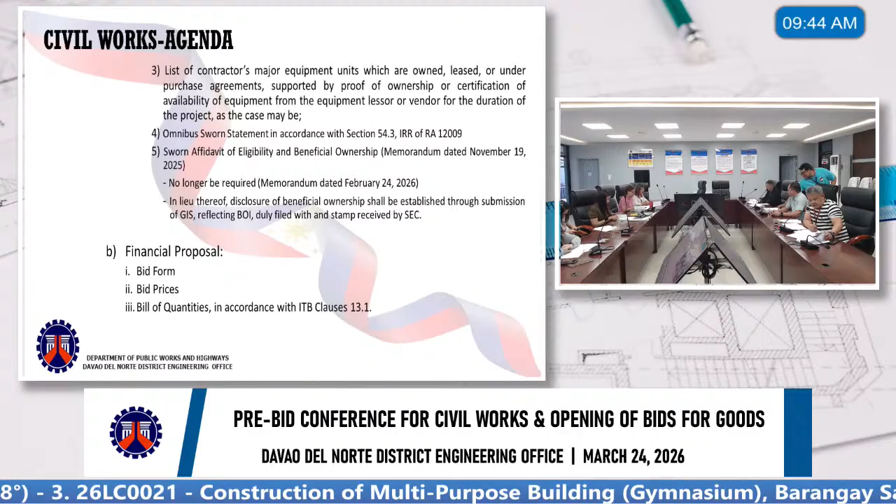Number 2 is the questions and comments from the bidders. Number 3 is other matters, including item 3.1, the interim guidelines upon lifting the suspension of procurement activities for locally funded civil works projects, as referred to in the memorandum dated September 16, 2025.

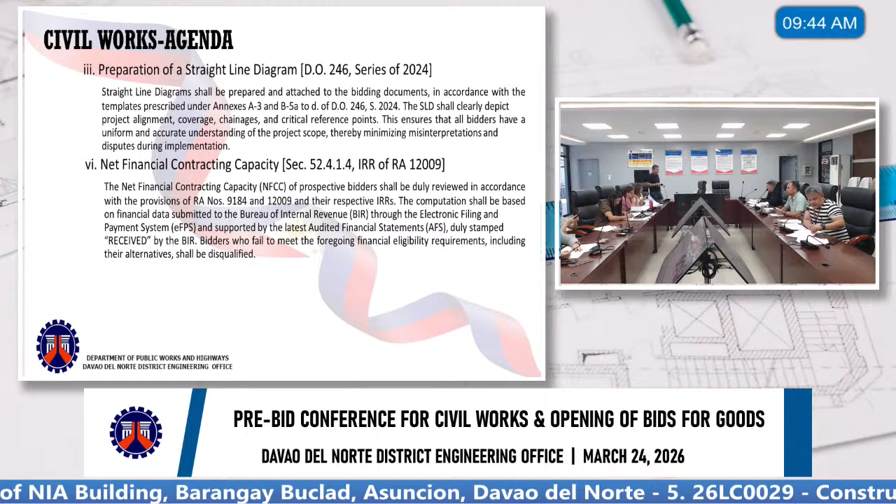Item 1 covers the live streaming of bidding activities under Section 38.2 of the IRR of RA 12009, and geotagging of project sites under DO 85 series of 2020. Then, preparation of straight line diagram under DO 246 series of 2024, and the NFCC or Net Financial Contracting Capacity under Section 52.4.1.4 of the IRR of RA 12009.

And the bidder's responsibilities under Department Order Number 28, Series of 2024, dated February 26, 2024, subject: the three-strike policy for infrastructure, goods, and consulting services.

Item 4 covers the occupational safety and health program in the instruction to bidders, under Department Order Number 241, Series of 2024, on guidelines for processing, approval, and reporting of construction safety and health programs for DPWH infrastructure projects, and Department Order Number 171, Series of 2025, dated August 30, 2025.

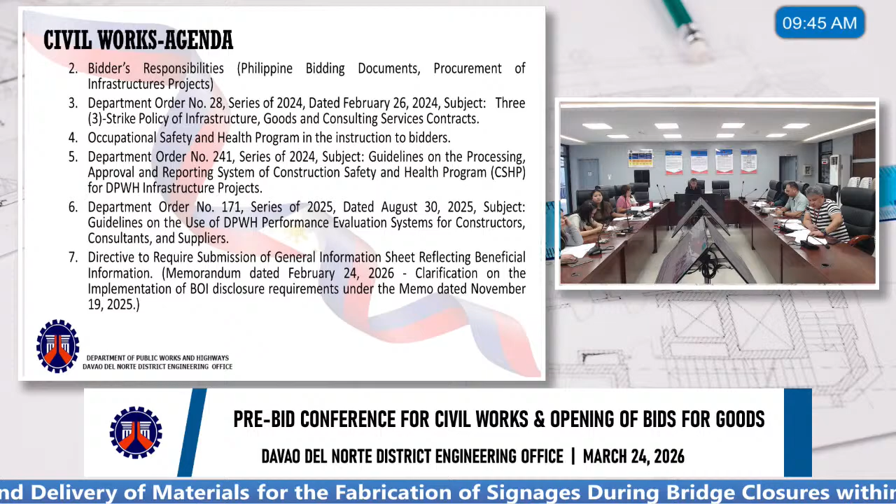Subject: guidelines on the use of the DPWH performance evaluation system for constructors, consultants, and suppliers. Item 7 is the directive to require submission of the GIS or General Information Sheet reflecting beneficial ownership information, per memorandum dated February 24, 2026.

Clarification on the implementation of BOI disclosure requirements under the memo dated November 19, 2025, and the summary of proceedings. We'd also like to emphasize DO 161, subject: guidelines for Bids and Awards Committee or BAC composition and reconstitution in the central, regional, and district engineering offices.

Under the timelines and effectivity, number 3 states current BAC members shall continue to function in a holdover capacity until the new BAC is officially designated. This is also reflected in Republic Act 12009, Section 41.2.6: upon expiration of the terms of the current BAC members, they shall continue to exercise their functions until new BAC members are designated.

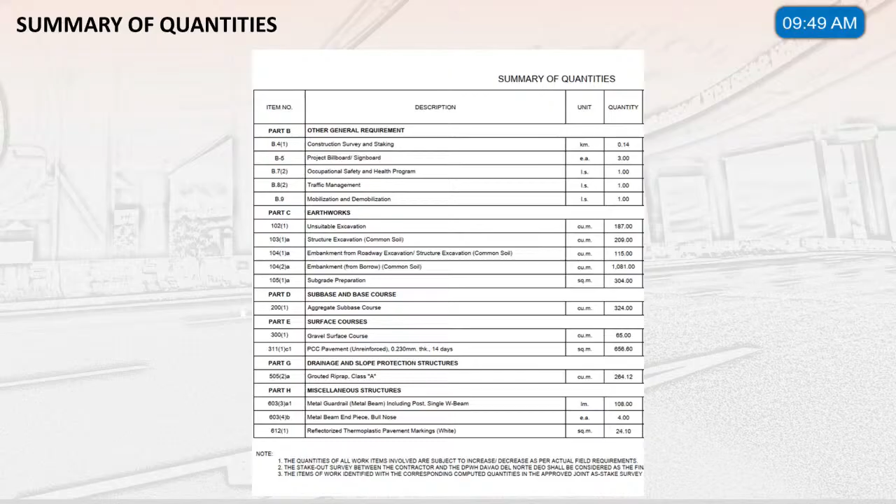Part E, surface courses - gravel surface course, PCCP pavement, unreinforced, 0.23 mm thick, 14 days. Part G, drainage and slope protection structures - grouted riprap, Class A. Part H, miscellaneous structures - metal guardrail, metal beam including post, single W beam, metal beam end piece, bull nose, reflectorized thermoplastic pavement markings white.

Location map. Then the cross-section. The geotag photos. The certification. I think that's all. Thank you.

Thank you. Any correction or need to be discussed from the previous, from the pre-procurement activity? None, Mr. Chair. Okay, for the implementing office? None? Okay. Thank you.

How about this? We will check from now on the major category of works. So no problem here? Same as the bridge? Okay. Any other queries from the board members? Okay, hearing none. Let's continue to the second project.

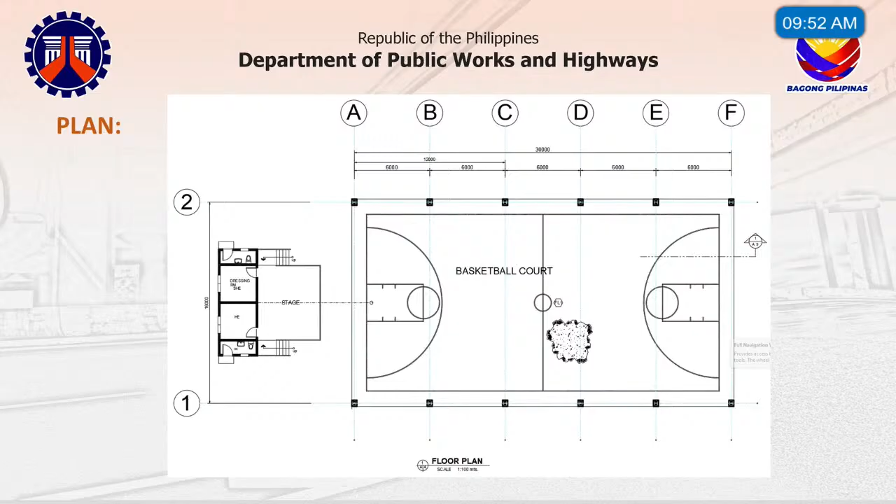You can see at the left side, we have the stage and also we have a 30 by 16 covered court. Next, for the proof of ownership, they have provided a survey plan.

For the DO1 series of 2026, we have Annex A and Annex B. And for the geotag photos, these are the existing MPB, which is to be removed. Then also at the right side, the CR will be removed.

For the summary of quantities, Part A is facilities for engineer - provision for furnitures, equipment, for the field office, and field office and living quarters building for the engineer. In the remarks, note that the equipment is for the engineer first. Then Part B is the other general requirements - permits and clearances, project billboard and signboard, occupational safety and health, mobilization and demobilization.

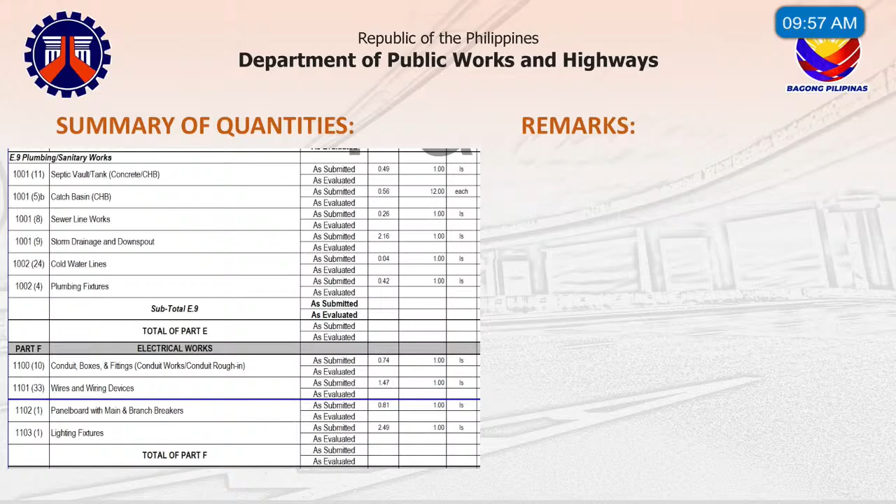And for part F, electrical works, we have conduit boxes and fittings, wires and wiring devices, panel board with main and branch breakers, and lighting fixtures.

Then for the mechanical work, we have a water tank, which is stainless. So that's the summary of quantities for this project.

Okay, thank you. Any matters for discussion? All changes and corrections are already incorporated. For the implementing office? None, Mr. Chair. Any members with queries or discussion? Hearing none, let's proceed to project number 3.

Sorry for that. So, what's the major category of works? Okay, let's proceed to the next project.

For the next project, again, I'm the presenter for 26LC0021, construction of multipurpose building, gymnasium, Barangay San Jose, New Corella, Davao del Norte, with coordinates 125.854603, 7.575390, with an ABC of 14,850,000 and a contract duration of 180 calendar days under FY 2026 GAA.

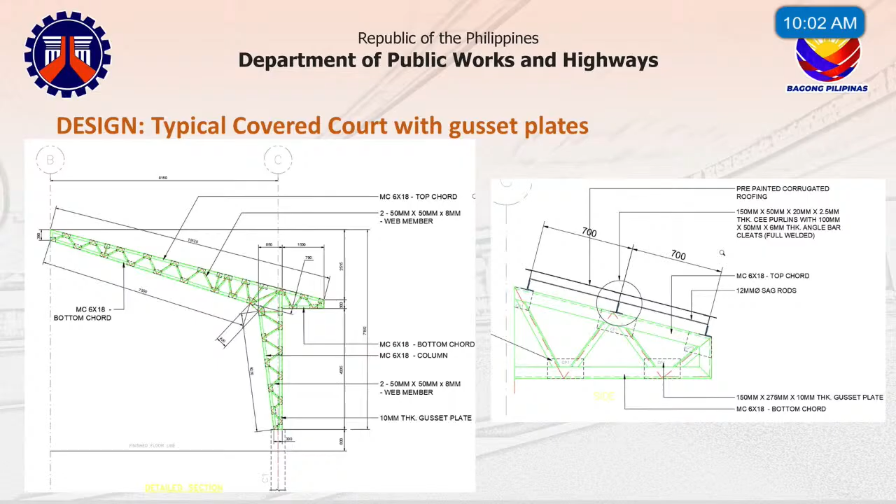Also typical covered court with gusset plates. Next.

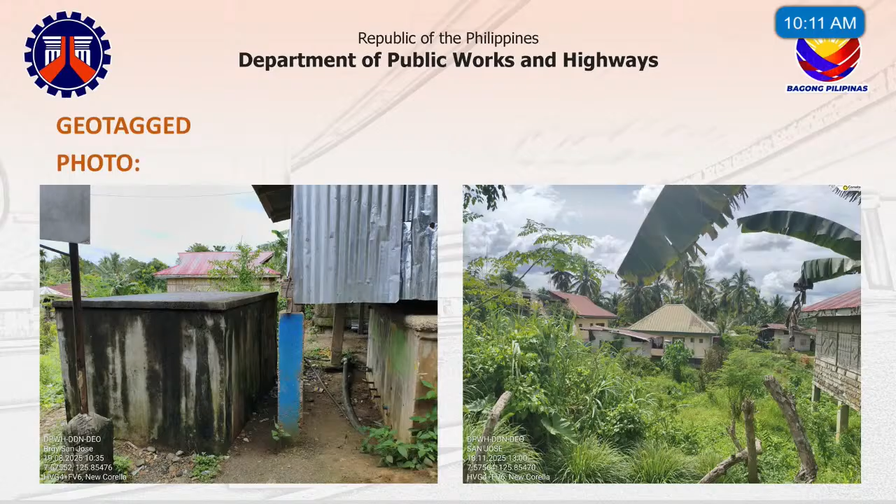Next. So as you can see in the picture, the portion goes down here. There's a big mound on that side.

Next. Okay, for the summary of quantities, we have Part A, facilities for the engineer: equipment for the field office, and construction of living quarters building for the engineer. Part B, other general requirements: permits and clearances, project billboard and signboard, occupational safety and health, mobilization and demobilization.

For Part C, earthworks: removal of structures and structure excavation for common soil, embankment from roadway, structure excavation for common soil, and embankment from borrow which is also common soil. And we also have gravel fill.

Then for Part D, reinforced concrete: we have structural concrete Class A 4,000 PSI and Class B 3,000 PSI, reinforcing steel grade 40 and grade 60, and also formworks and falseworks.

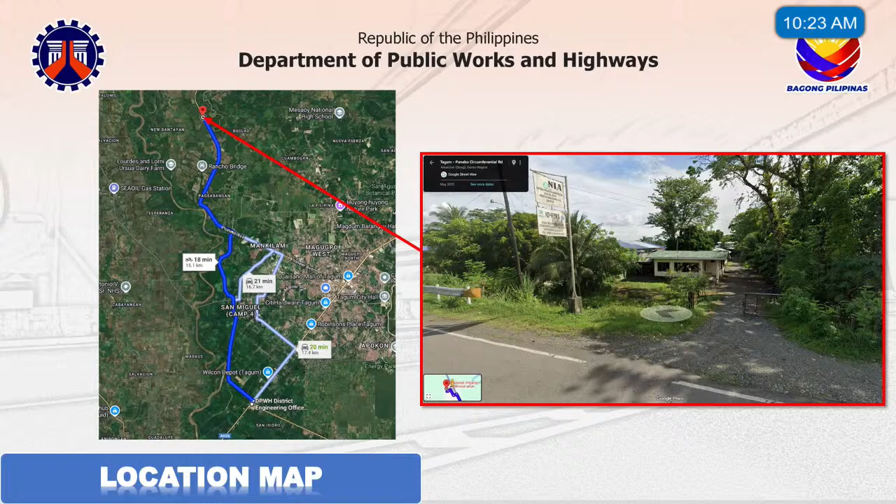So this is the location map of the site, approximately 15 to 17 kilometers away from the DPWH office. And these are the geotag photos. So this is for the exterior of the existing building, and this is the interior.

So we can see there are damages on the ceiling due to the leaking of the roof, which is one of the major repairs for this project. And the site validation sheet.

And this is the site development map, site development plan, where we can see that the site is strategically near the road, so accessibility is good, and this is the perspective for the building.

And for the floor plan, so the floor area is 16 by 14 meters. And for...

So upon validation, it was verified that there are no existing columns. So for this project, we have included additional columns on the rear side of the building, colored red on the floor plan. And this is the truss detail.

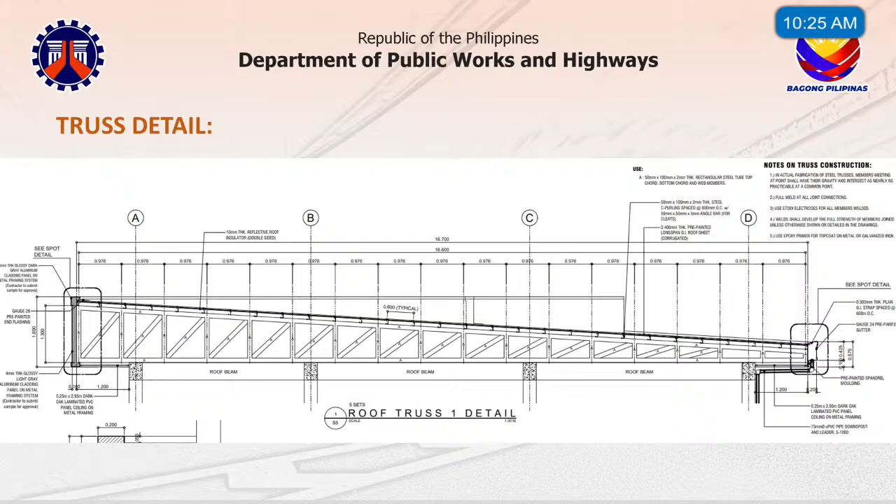This is also the truss detail for roof truss 2. So this is the minimum equipment requirement for this project.

And these are the included pay items. Part B, we have other general requirements, including permits, project billboard or signboard, occupational safety and health, mobilization and demobilization. We also have items for the signages, specifically the agency name.

Part C, we have earthworks, removal of structure and obstruction for the existing roofing and its frame, including ceiling, as well as the rear walls. We also have items for structural excavation, common soil, embankment from roadway or structural excavation, common soil, and gravel fill.

For Part D, we have reinforced concrete, structural concrete Class B, 3,000 PSI for the front extension and ramp. Structural concrete Class A, 4,000 PSI for our additional rear columns, reinforcing steel bar grade 40 and 60, and formworks and falsework. For Part E, we have finishing.

Sanitary and other civil works, masonry works 100mm and 150mm, ceiling, pre-painted metal panel for the eaves, rib type, wall for the partition between storage and pantry, carpentry and joinery works, PVC ceiling panels on metal frame for the inside ceiling, glazed and unglazed tiles, cement plaster finish.

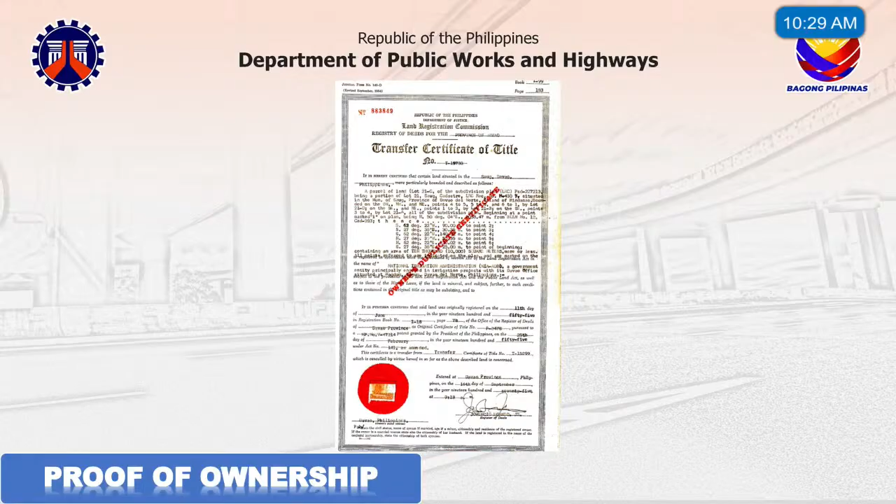And this is the proof of ownership, which is a certificate of title under the agency, the NIA, which legitimizes the use of the site. That would be all. Thank you.

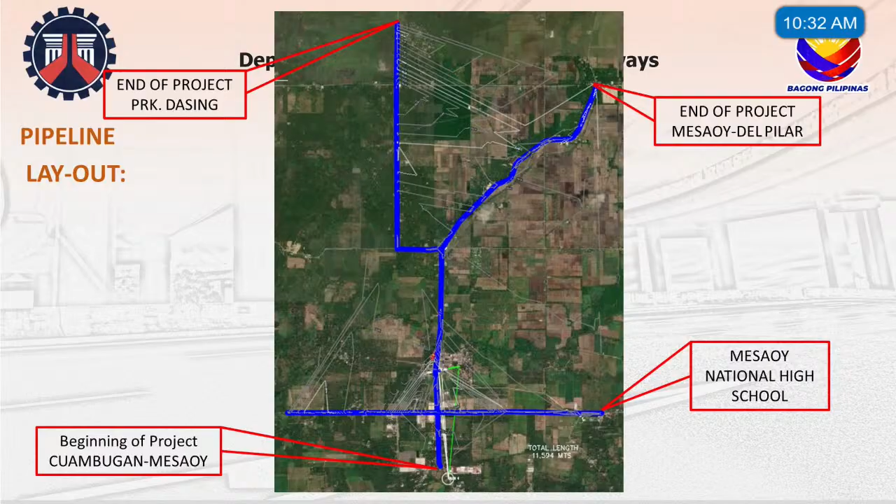And there's a crossing from National High School of Mesaoy and junction to Purok Dasing. Next, this is the typical drawing for the pipeline traversing PCCP. So this is the details. Also the detailed plan for pipeline crossing bridge.

And for the construction of elevated tank, there are two elevated tanks to be constructed. First is the 40 cubic, located at the barangay site. And next is the 20 cubic.

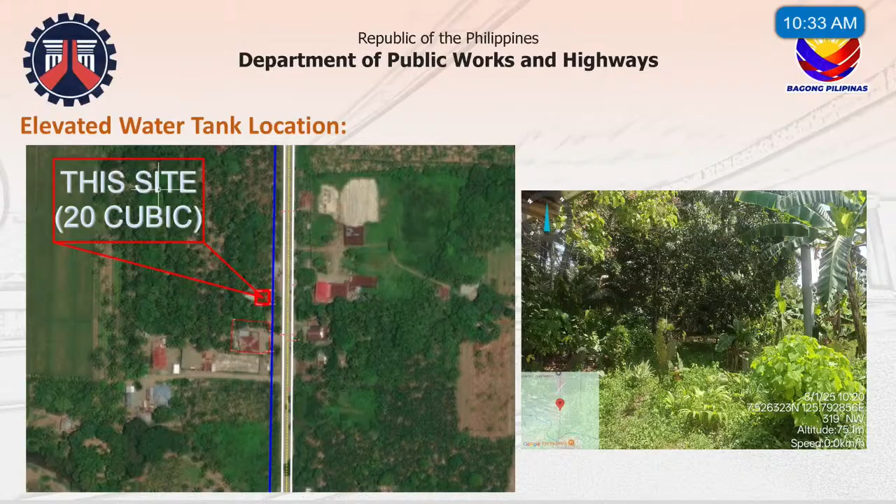So this is the geotag photos of the site. Next, geotag photos. So next, this is the MOA from our office in the water district, the MOA between DPWH and Tagum City Water District, sir.

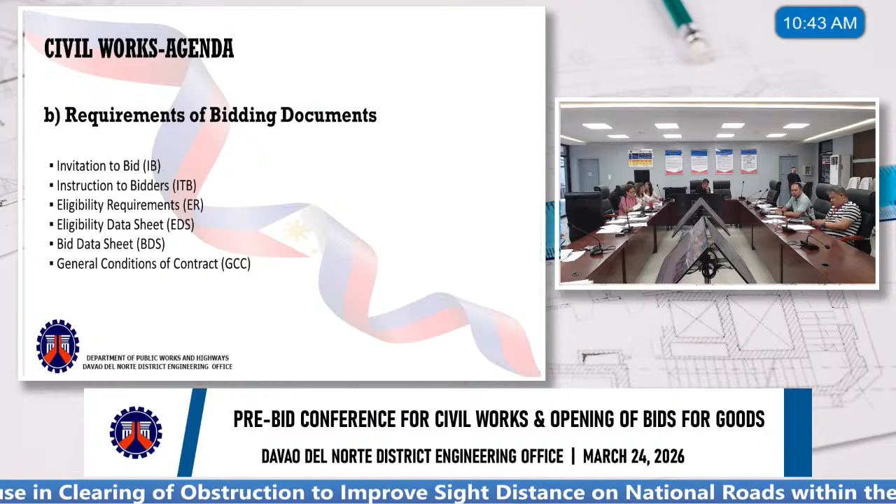Good morning, Mr. Chair. Good morning to all our bidders. So the requirements of bidding documents, including invitation to bid, instruction to bidders, bid data sheet, general conditions of contract, special conditions of contract, specification, drawings, bill of quantities, and Philippine bidding documents related forms.

The bidding documents were posted on the DPWH website and PhilGEPS. Amendments in the provision of the bidding documents shall be issued through a supplemental bid bulletin and will be posted in the bid bulletin and notices.

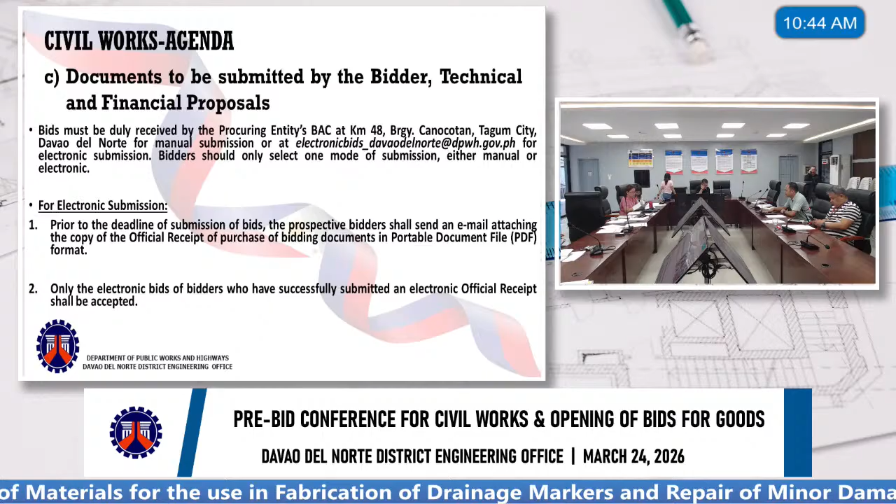Documents to be submitted by the bidder: technical and financial proposals. Bids must be duly received by the procuring entity's BAC at Kilometer 48, Barangay Canocotan, Tagum City, Davao del Norte for manual submission, or at electronicbids_davaodelnorte at dpwh.gov.ph for electronic submission. Bidders should only select one mode of submission, either manual or electronic.

For electronic submission, prior to the deadline of submission of bids, the prospective bidder shall send an email attaching a copy of the official receipt of purchase of bidding documents in PDF format. Only the electronic bids of bidders who have successfully submitted an electronic official receipt shall be accepted.

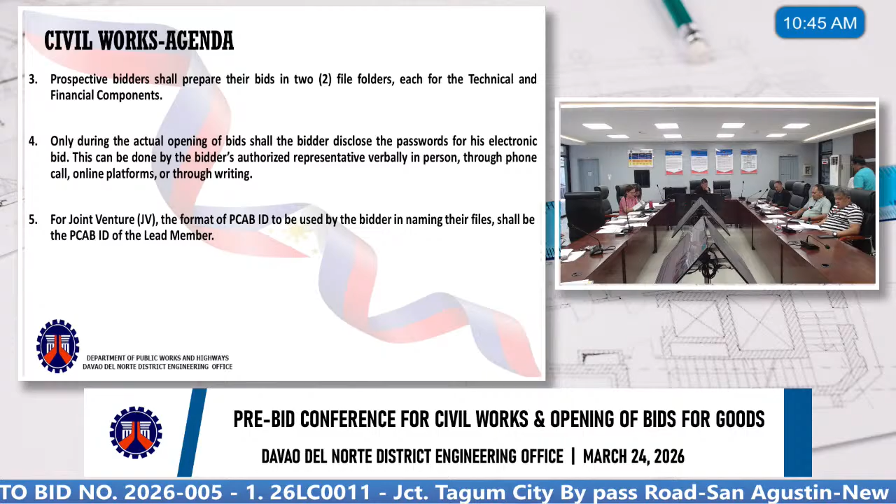Prospective bidders shall prepare their bids in 2 file folders in appropriate documents and file format, each for the technical and financial components. Only during the actual opening of bids shall the bidder disclose the passwords for his electronic bid. This can be done by the bidder's authorized representative verbally in person, through phone call, online platforms, or through writing.

For joint ventures, the format of PCAB ID to be used by the bidder in naming their files shall be the PCAB ID of the lead member. The step-by-step detailed procedure of electronic submission is stipulated in the bidding documents, Clause 22, and Department Order 87, Series of 2020. Also included in the Department Order are the steps for modification of an electronic bid, non-participation in the bidding, withdrawal of electronic bid, and the proper email subject and file name for each file to be submitted to the designated email address.

For the technical proposal: PhilGEPS Certificate of Registration, Platinum Membership in accordance with Section 20 of the IRR, PCAB license and registration in case of joint venture.

Statement of all ongoing government and private contracts, including contracts awarded but not yet started, if any, whether similar or not similar in nature and complexity to the contract to be bid.

Statement of the bidder's single largest completed contract, or SLCC, in accordance with ITB Clause 5-5. The SLCC shall be supported by an owner's certificate of final acceptance issued by the project owner other than the contractor, or a final rating of at least satisfactory in the CPES, or a similar performance and monitoring system. In case of contracts with the private sector, an equivalent document shall be submitted.

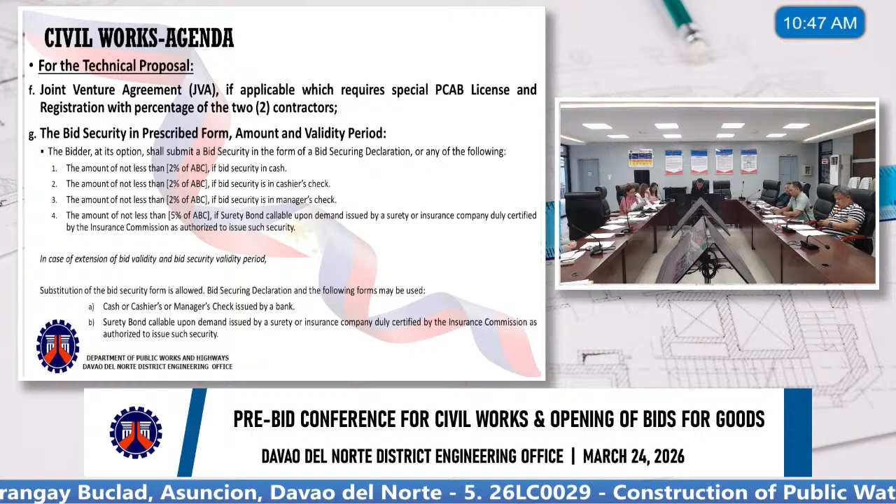The bidder at its option shall submit a bid security in the form of a bid securing declaration or any of the following: an amount of not less than 2% of ABC if bid security is in cash, cashier's check, or manager's check, and an amount of not less than 5% of ABC if surety bond.

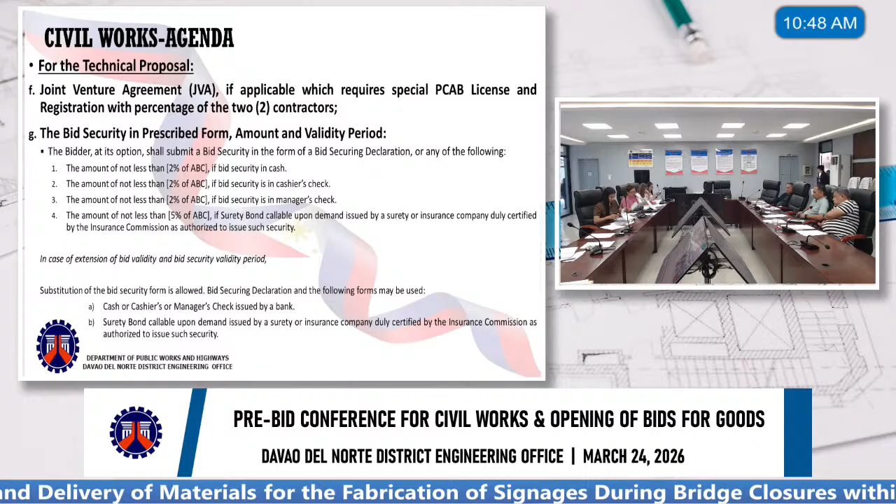In case of extension of bid validity and bid security validity period, substitution of the bid security form is allowed. A bid securing declaration and the following forms may be used: cash, cashier's or manager's check issued by a bank, or a surety bond callable upon demand issued by a surety or insurance company duly certified by the Insurance Commission as authorized to issue such security. The bid shall remain valid for the period specified in the BDS, which shall not exceed 120 calendar days from the date of the opening of bids.

Should it become necessary to extend the validity of the bids and the bid securities beyond 120 calendar days, the procuring entity concerned shall request in writing all those who submitted bids for such extension before the expiration date. Any discrepancy in the amount, even a centavo, means non-compliance.

The project requirements shall include the following: an organizational chart of the personnel to be deployed for the procurement project to be bid, and a list of contractors' personnel, for example project manager, project engineers, materials engineers, and foremen, to be assigned to the project, with their complete qualifications and experience data. This personnel must meet the required minimum years of experience set in the BDS.

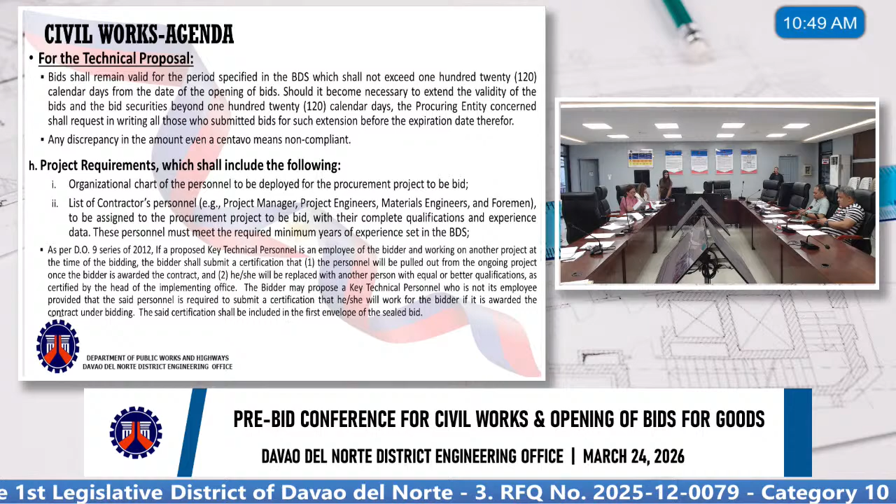As per Department Order Number 9, Series of 2012, if a proposed key technical personnel is an employee of the bidder and working on another project at the time of the bidding, the bidder shall submit a certification that the personnel will be pulled out from the ongoing project once the bidder is awarded the contract, and he or she will be replaced with another person with equal or better qualifications as certified by the head of the implementing office.

The bidder may propose a key technical personnel who is not its employee, provided that the said personnel is required to submit a certification that he or she will work for the bidder if it is awarded a contract under the bidding. The said certification shall be included in the first envelope of the sealed bid.

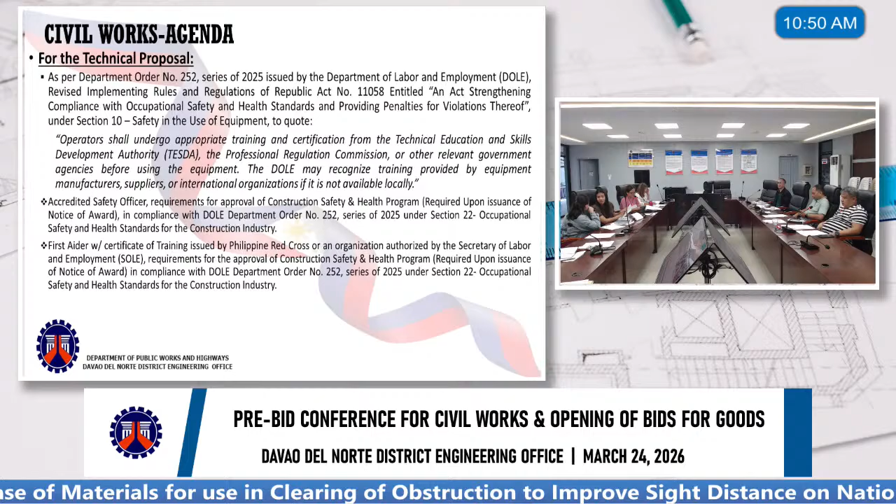As per Department Order Number 252, Series of 2025, issued by the Department of Labor and Employment, revised implementing rules and regulations of Republic Act Number 11058, entitled An Act Strengthening Compliance with Occupational Safety and Health Standards and Providing Penalties for Violations Thereof, under Section 10, Safety in the Use of Equipment, operators shall undergo appropriate training and certification from the Technical Education and Skills Development Authority or TESDA, the Professional Regulation Commission, or other relevant government agencies before using the equipment.

The DOLE may recognize training provided by equipment manufacturers, suppliers, or international organizations if it is not available locally. An accredited safety officer is a requirement for approval of the construction safety and health program, required upon issuance of notice of award, in compliance with DOLE Department Order Number 252, Series of 2025, under Section 22, Occupational Safety and Health Standards for the Construction Industry.

A first aider with certificate of training issued by the Philippine Red Cross or an organization authorized by the Secretary of Labor and Employment is a requirement for the approval of the construction safety and health program, required upon issuance of notice of award, in compliance with DOLE Department Order Number 252, Series of 2025, under Section 22, Occupational Safety and Health Standards for the Construction Industry.

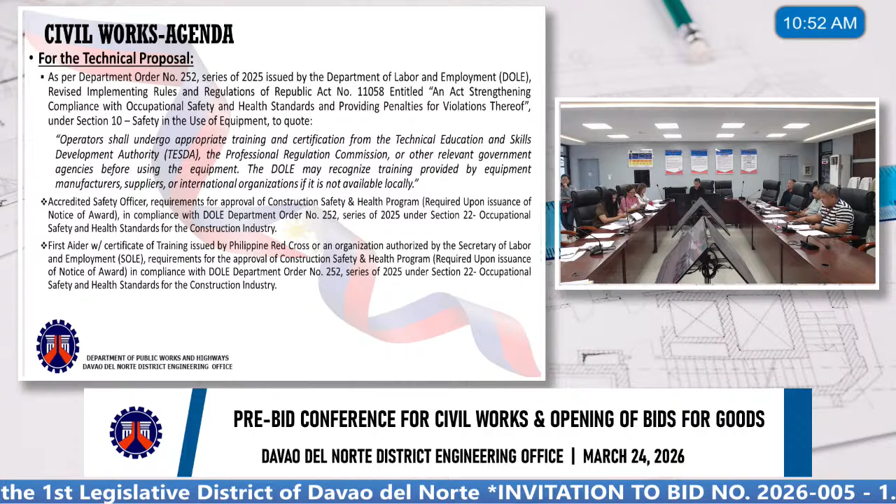A list of contractors' major equipment units which are owned, leased, or under purchase agreements, supported by proof of ownership or certification of availability of equipment from the equipment lessor or vendor for the duration of the project, as the case may be, which must meet the minimum requirements for the contract set in the BDS.

As per Department Order 58, Series of 2012, all prospective bidders are mandated to state in their bid documents a complete technical description of their pledged equipment, whether owned or leased, such as but not limited to the engine number, year, model, chassis number, plate number, production capacity, and load capacity.

In addition, prospective bidders should also be required to state in their bid documents the particular place or site where the equipment is located, as provided for under Department Order Number 9, Series of 2012. If any piece of equipment is not in the location, then the bidder shall be post-disqualified. Failure by a prospective bidder to comply with the said requirements shall result in the bidder's automatic post-disqualification for award of contract and forfeiture of its bid security.

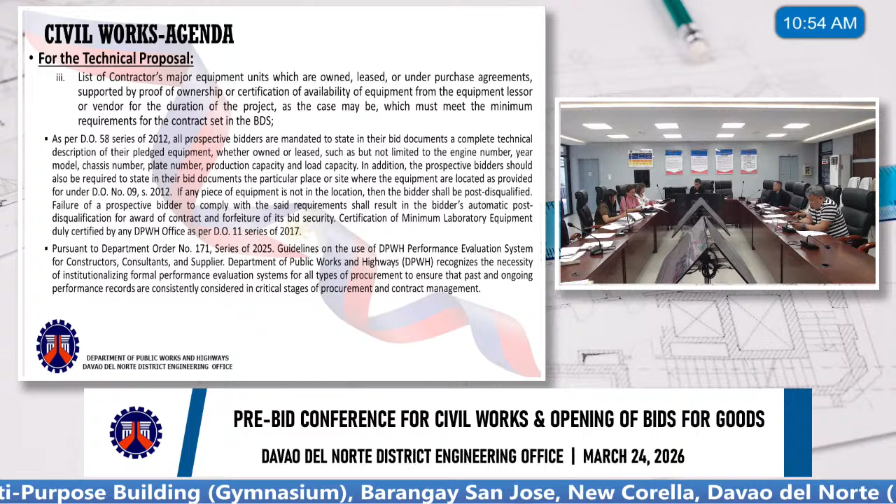Certification of minimum laboratory equipment duly certified by any DPWH office, as per Department Order 11, Series of 2017. Pursuant to Department Order Number 171, Series of 2025, Guidelines on the use of DPWH Performance Evaluation System for Constructors, Consultants, and Suppliers, DPWH recognizes the necessity of institutionalizing a formal performance evaluation system for all types of procurement.

To ensure that past and ongoing performance records are consistently considered in critical stages of procurement and contract management, at the eligibility stage, pursuant to Section 54-4-2-5 of the IRR for infrastructure projects, bidders shall submit proof of satisfactory past performance, such as CPES rating of at least satisfactory, or an owner's certificate of final acceptance or equivalent for private sector contracts.

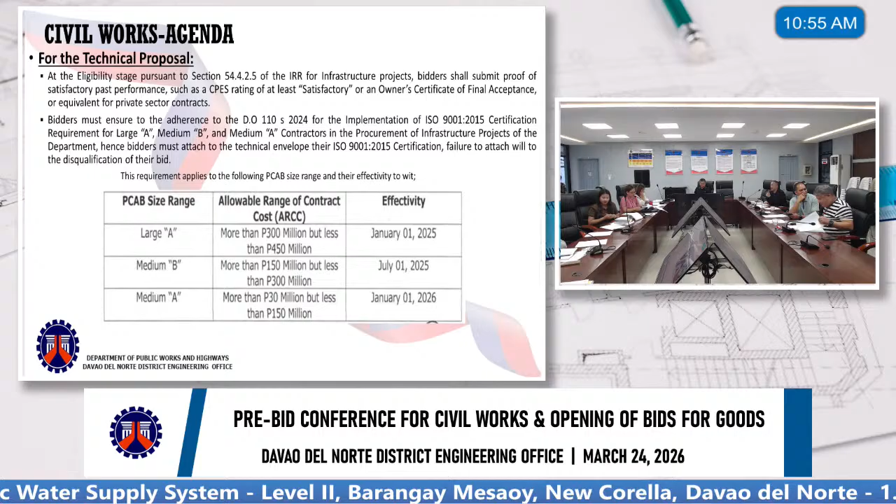Bidders must ensure adherence to Department Order 110, Series of 2024, for the implementation of ISO 9001:2015 certification requirements for large A, medium B, and medium A contractors in the procurement of infrastructure projects of the department. Hence, bidders must attach to the technical envelope their ISO 9001:2015 certification. Failure to attach will result in disqualification of their bid.

Also, in compliance with Section 17 of the Department of Labor and Employment Department Order Number 13, the implementation of construction safety shall be considered in all stages of project procurement, design, estimate, and construction, and its cost shall be integrated into the overall project cost under pay items B-71 and B-72, Occupational Safety and Health, as a lump sum amount to be quantified in the detailed estimate.

Pursuant to Department Order Number 169, Series of 2025, only accredited project engineers may be assigned to DPWH projects. The Omnibus Sworn Statement, in accordance with Section 54-3 of the IRR, has 11 items.

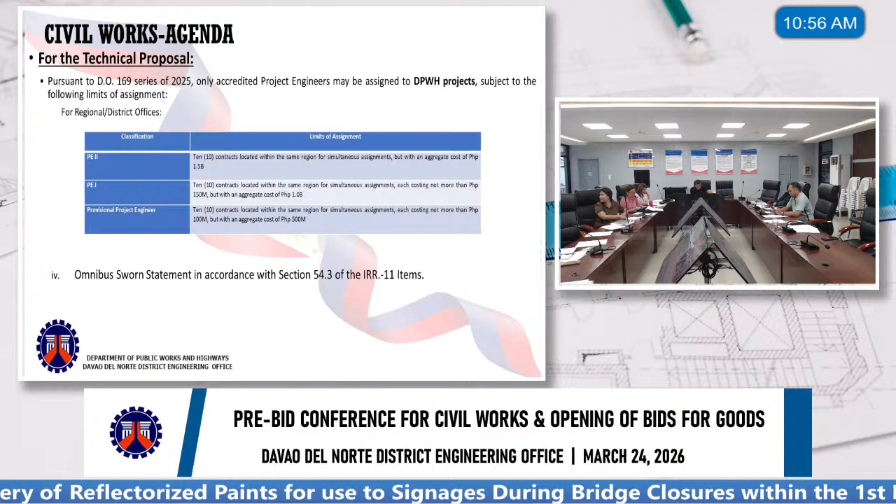And to ensure compliance with the memorandum dated February 24, 2026, with the subject clarification on the implementation of beneficial ownership information or BOI disclosure requirements under the memorandum dated November 19, 2025, in accordance with RA Number 12009, which provides for the disclosure of beneficial ownership information for legal entities participating in government procurement.

In this regard, and consistent with the intent of said provisions, the following implementation guidance is adopted. Number 1, considering that the current Omnibus Statement already incorporates sworn declarations relating to beneficial ownership disclosure, and in order to streamline documentary requirements and avoid duplication of sworn submissions, the separate submission of the sworn affidavit of eligibility and beneficial ownership, Annex A, shall no longer be required.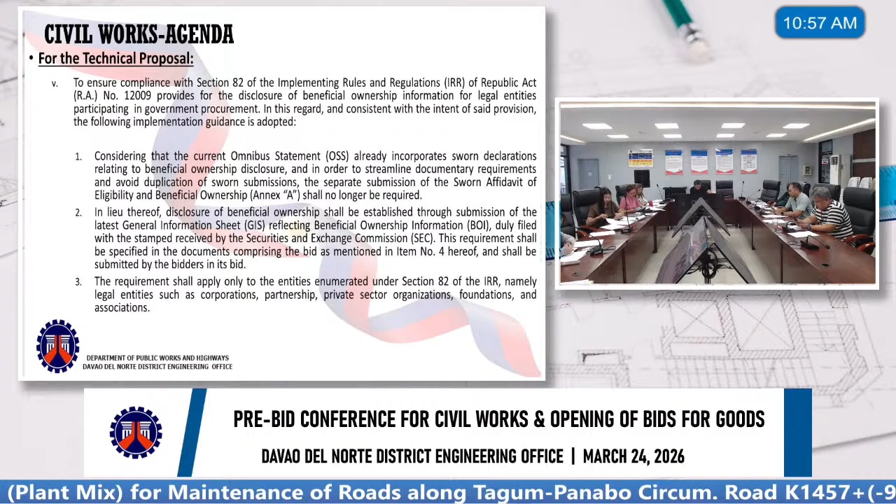In lieu thereof, disclosure of beneficial ownership shall be established through submission of the latest General Information Sheet or GIS, reflecting beneficial ownership information or BOI, duly filed with the stamp received by the Securities and Exchange Commission or SEC.

This requirement shall be specified in the documents comprising the bid as mentioned in item number 4 hereof, and shall be submitted by the bidders in its bid. The requirement shall apply only to the entities enumerated under Section 82 of the IRR, namely legal entities such as corporations, partnerships, private sector organizations, foundations, and associations.

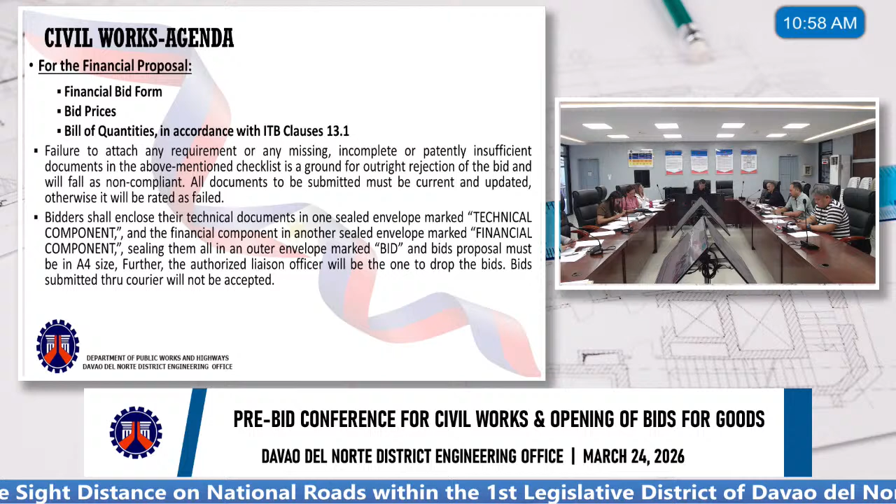For the financial proposal, financial bid form, bid prices, and bill of quantities in accordance with ITB Clause 13-1. Failure to attach any requirement, or any missing, incomplete, or patently insufficient documents in the above-mentioned checklist, is a ground for outright rejection of the bid and will fall as non-compliant.

All documents to be submitted must be current and updated; otherwise, it will be rated as failed. Bidders shall enclose their technical documents in one sealed envelope marked technical component, and the financial component in another sealed envelope marked financial component, sealing them all in an outer envelope marked bid, and the bid's proposal must be in A4 size. Further, the authorized liaison officer will be the one to drop the bids. Bids submitted through courier will not be accepted.

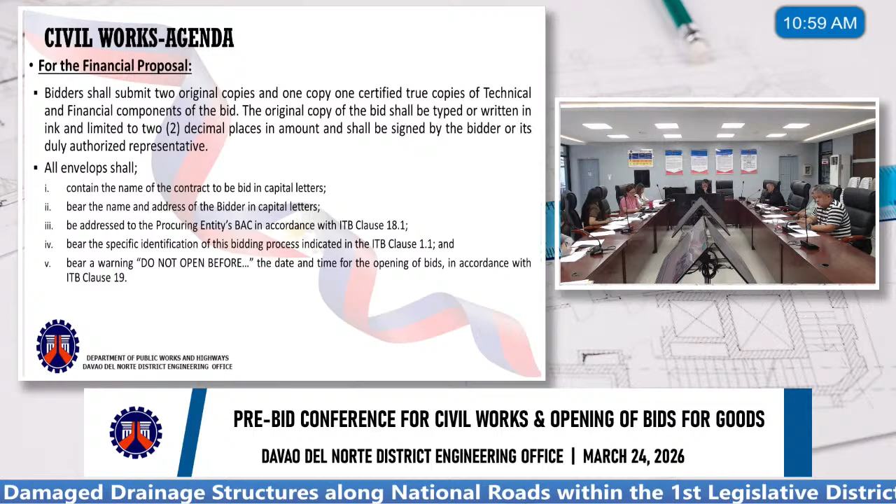Bidders shall submit 2 original copies and 1 copy of certified true copies of the technical and financial components of the bid. The original copy of the bid shall be typed or written in ink, limited to 2 decimal places in amount, and shall be signed by the bidder or its duly authorized representative.

All envelopes shall contain the name of the contract to be bid in capital letters, bear the name and address of the bidder in capital letters, be addressed to the procuring entity's BAC in accordance with ITB Clause 18-1, bear the specific identification of this bidding process indicated in ITB Clause 1-1, and bear a warning: do not open before the date and time for the opening of bids, in accordance with ITB Clause 19.

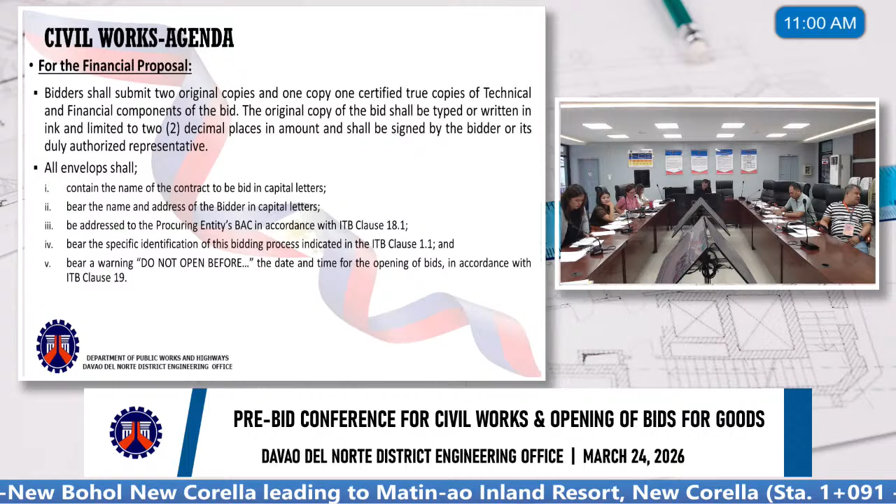The bidders are also advised to be responsible on their bids submitted in accordance with the checklist, and their technical and financial proposal should have proper tabbing in words based on the order in the checklist, including proper sequencing of documents in chronological order. Further, bidders were advised not to recycle legal documents or documents attached in the previous submission of bids which have the signatures and countersigns of the BAC members.

Late bids submitted will not be accepted. All forms as mentioned in ITB Clause 17-1 must be completed without any alterations to their format. No substitute form shall be accepted.

Each and every page of the bid form, including the bill of quantities under Section 9 hereof, shall be signed by the duly authorized representative of the bidder. Failure to do so shall be a ground for the rejection of the bid.

Any insertions, erasures, or overwriting shall be valid only if they are signed or initialed by the duly authorized representative of the bidder. Bidders with lowest bid during the opening of bid is not a guarantee to be awarded for the contract. All bid documents are subject to detailed bid evaluation and post-qualification prior to be declared as lowest calculated responsive bid and subsequently to be awarded for the contract.

The bidders are given 3 days after the bidding to file for a motion for reconsideration.

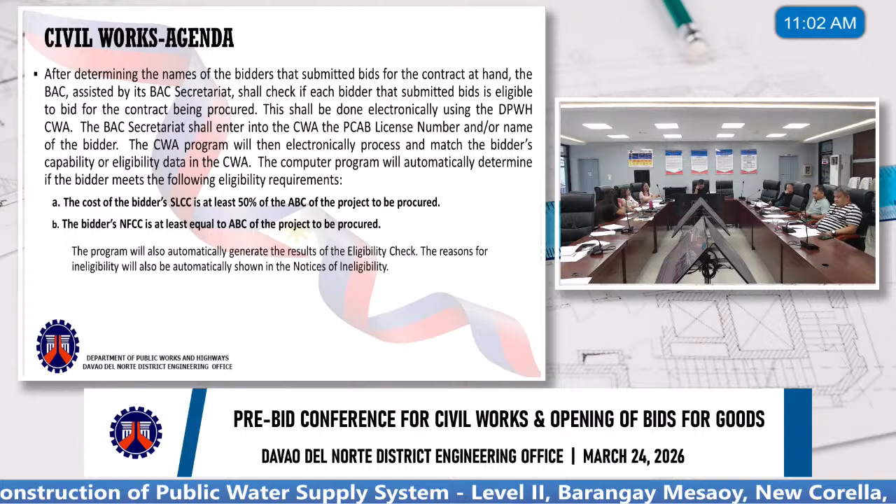The BAC Secretariat shall enter into the CWA the PCAB license number and name of the bidder. The CWA program will then electronically process and match the bidder's capability or eligibility data in the CWA. The computer program will automatically determine if the bidder meets the following eligibility requirements.

The cost of the bidder's SLCC is at least 50% of the ABC of the project to be procured, and the bidder's NFCC is at least equal to the ABC of the project to be procured. The program will also automatically generate the results of the eligibility check. The reasons for ineligibility will also be automatically shown in the notices of ineligibility.

Bidding will be conducted through competitive bidding procedures using a non-discretionary pass-fail criterion as specified in the IRR, otherwise known as the New Government Procurement Act (NGPA).

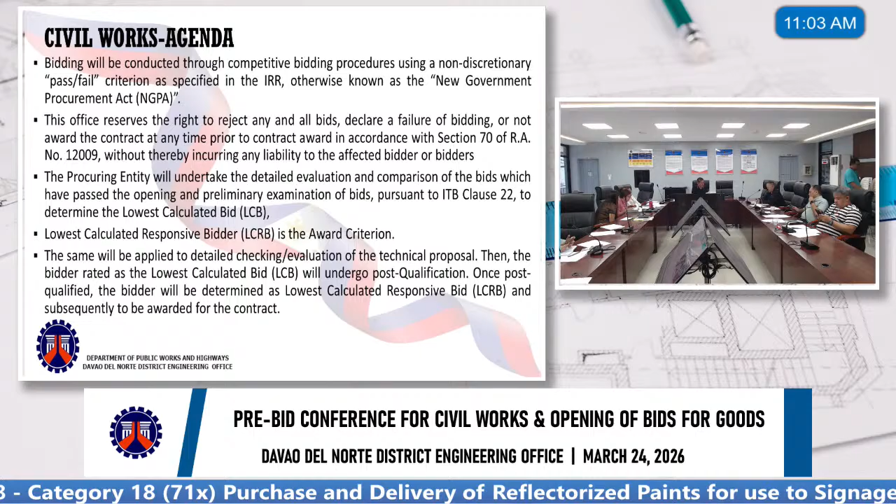This office reserves the right to reject any and all bids, declare a failure of bidding, or not award a contract at any time prior to contract award in accordance with Section 70 of RA number 12009, without thereby incurring any liability to the affected bidder or bidders.

The procuring entity will undertake the detailed evaluation and comparison of the bids which have passed the opening of and preliminary examination of bids pursuant to ITB Clause 22 to determine the lowest calculated bid.

Lowest calculated responsive bidder is the award criterion. The same will be applied to detailed checking, evaluation of the technical proposal. Then, the bidder rated as the lowest calculated bid will undergo post-qualification. Once post-qualified, the bidder will be determined as lowest calculated responsive bid and subsequently to be awarded for the contract.

All bidders found to have conflicting interest shall be disqualified to participate in the procurement at hand, without prejudice to the imposition of appropriate administrative, civil, and criminal sanctions.

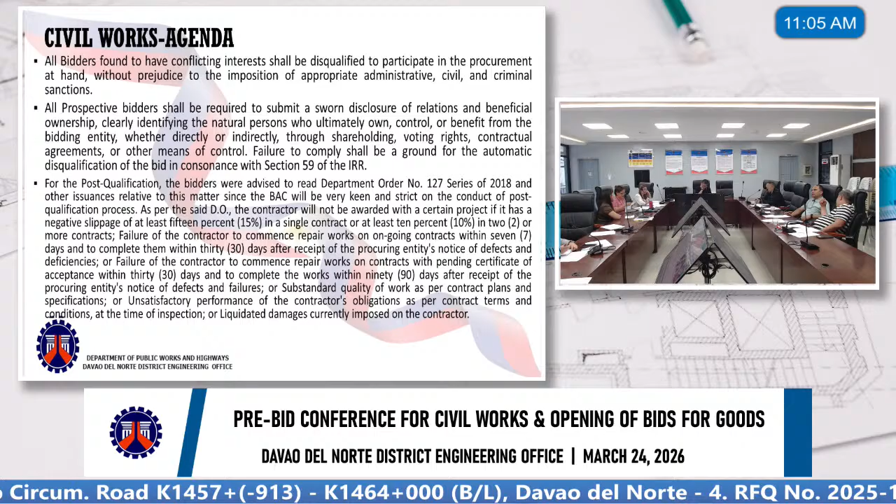All prospective bidders shall be required to submit a sworn disclosure of relations and beneficial ownership, clearly identifying the natural persons who ultimately own, control, or benefit from the bidding entity, whether directly or indirectly through shareholding, voting rights, contractual agreements, or other means of control.

Failure to comply shall be a ground for the automatic disqualification of the bid in consonance with Section 59 of the IRR. For the post-qualification, the bidders were advised to read Department Order No. 127, Series of 2018, and other issuances relative to this matter, since the BAC will be very keen and strict on the conduct of post-qualification process.

As per the said Department Order, the contractor will not be awarded with a certain project if it has a negative slippage of at least 15% in a single contract, or at least 10% in two or more contracts.

Failure of the contractor to commence repair works on ongoing contracts within 7 days and to complete them within 30 days after receipt of the procuring entity's notice of defects and deficiencies, or failure of the contractor to commence repair works on contracts with pending certificate of acceptance within 30 days and to complete the works within 90 days after the receipt of the procuring entity's notice of defects and failures, or substandard quality of work as per contract plans and specifications, or unsatisfactory performance of the contractor's obligation as per contract terms and conditions at the time of inspection, or liquidated damages currently imposed on the contractor.

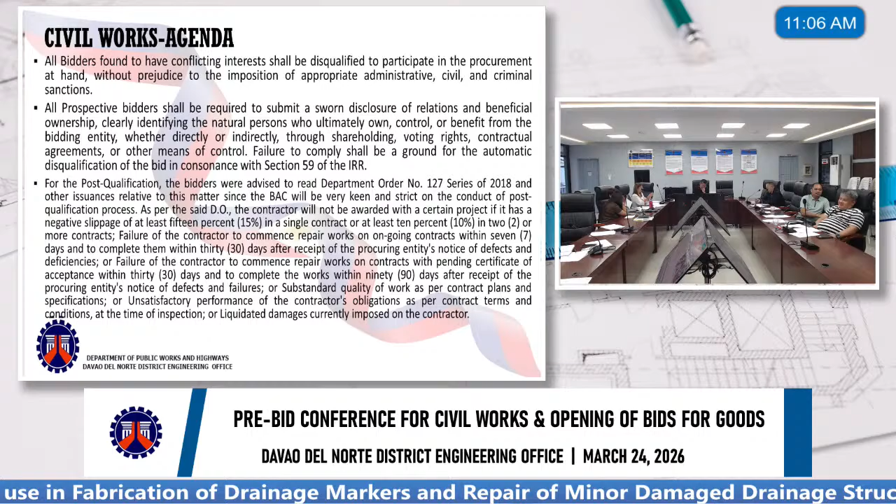During post-qualification, even though the contractor is the lowest bidder, it is still subject for further verification to ensure compliance with the requirements of the contract. With that, we will be sending you a letter being the lowest calculated responsive bid.

Moreover, the qualification and experience of the key technical personnel is subject for verification as part of post-qualification process as per DO 127 series of 2018. The BAC, with the assistance of the equipment verification team, will be strict on the compliance of the equipment as part of post-qualification as per DO number 127 series of 2018. The equipment verification team will conduct an inspection on the verification of the equipment pledged by the contractor.

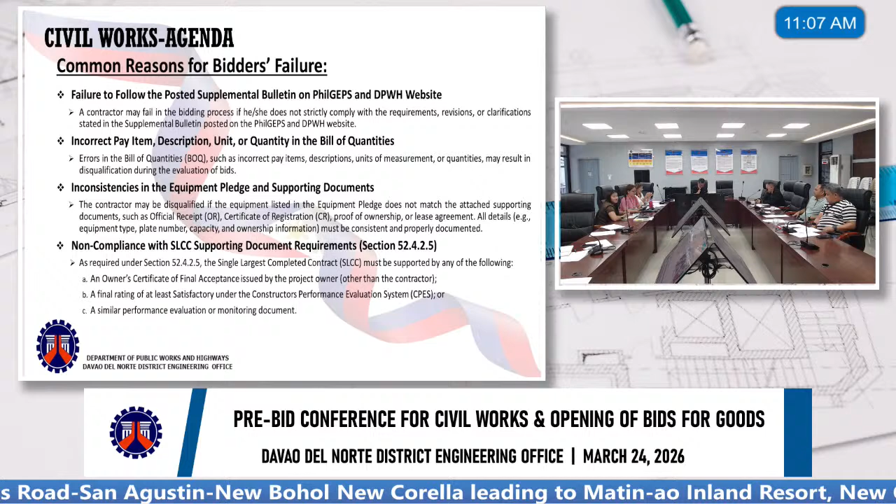Mr. Chair, we would like to remind our bidders of the common reasons for a bidder's failure. Number one, failure to follow the posted supplemental bulletin on PhilGEPS and DPWH website. A contractor may fail in the bidding process if he or she does not strictly comply with the requirements, revisions, or clarifications stated in the supplemental bulletin posted on the PhilGEPS and DPWH website.

Also, there is an incorrect pay item, description, unit, or quantity in the bill of quantities. Errors in the bill of quantities, such as incorrect pay items, description, units of measurement, or quantities may result in disqualification during the evaluation of bids.

There are inconsistencies in the equipment pledge and supporting documents. The contractor may be disqualified if the equipment listed in the equipment pledge does not match the attached supporting documents such as official receipt, certificate of registration, proof of ownership, or lease agreement. All details, equipment type, plate number, capacity, and ownership information must be consistent and properly documented.

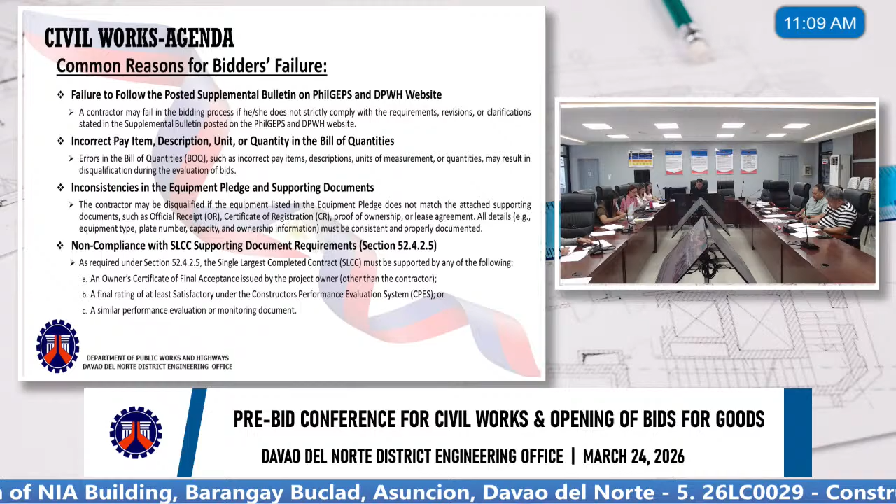The non-compliance with SLCC supporting document requirements, this is under section 52-4-2-5. As required under such section or provision, the single largest completed contract must be supported by any of the following: an owner's certificate of final acceptance issued by the project owner other than the contractor, a final rating of at least satisfactory under the Constructor's Performance Evaluation System or CPES, or a similar performance evaluation or monitoring document. For contracts with the private sector, an equivalent supporting document must be submitted. Failure to provide the required documentation may result in disqualification.

Alteration or substitution of prescribed bidding forms. Section 9, the Philippine Bidding Documents Related Forms, ITB Clause 17-1. Pursuant to Section 9 of the Philippine Bidding Documents Related Forms, the forms required under ITB Clause 17-1 must be completed strictly in accordance with their prescribed format. No alterations, modifications, or substitutions of the official forms shall be accepted. Any deviation from the required format may lead to the rejection of the bid. That's all, Mr. Chair.

Okay, thank you for questions and comments from the bidders. Good morning, everyone. There are 16 views, 3 concurrent viewers. There is no comment, Mr. Chair. Okay, thank you.

And for the other matters? For the other matters, our department issued the memorandum and department orders for information and guidance for our prospective bidders. Number 1, interim guidelines upon lifting of suspension on procurement activities for locally funded civil works projects as referred to in DPWH Memorandum dated September 16, 2025. And under this memorandum, live streaming of bidding activities, see Section 38.2 of the IRR of RA 12009.

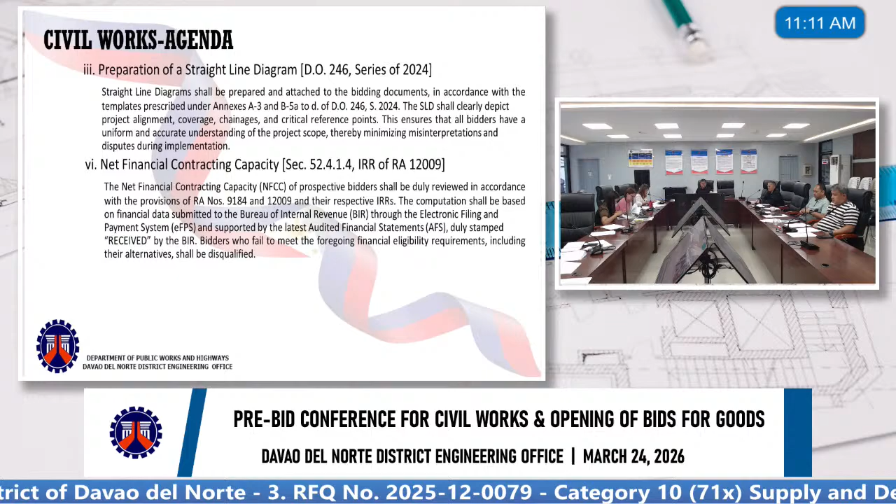And the geo-tagging of project sites, DO 85 series of 2020. Preparation of a straight line diagram under DO 246 series of 2024. Net financial contracting capacities, see Section 52.4.1.4 of the IRR of RA 12009.

And number 2, bidders' responsibilities in the Philippine Bidding Documents procurement of infrastructure projects, number 3, Department Order number 28, Series of 2024, dated February 26, 2024, subject: 3 strike policy of infrastructure, goods, and consulting services contracts. Number 4, occupational safety and health program in the instruction to bidders.

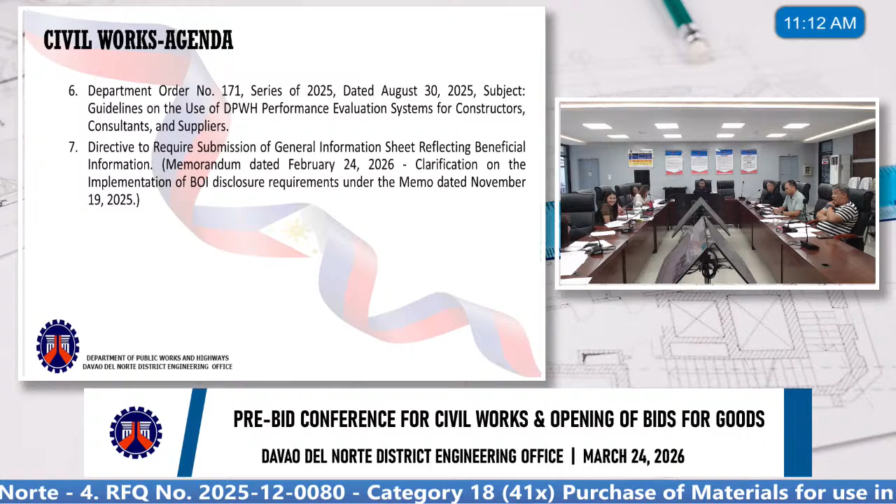Number 5, Department Order number 241, Series of 2024, subject: guidelines on the processing, approval, and reporting system of construction safety and health program for DPWH infrastructure projects. Number 6, Department Order number 171, Series of 2025, dated August 30, 2025, subject: guidelines on the use of DPWH performance evaluation systems for constructors, consultants, and suppliers. And last, number 7, directive to require submission of general information sheet reflecting beneficial ownership information, the memorandum dated February 24, 2026, clarification on the implementation of beneficial ownership disclosure requirements under the memorandum dated November 19, 2025.

We also have to remind our prospective bidders that their bid documents must follow the completeness and sufficiency requirements. The discounts offered should be clearly and legibly written with signatures so that the BAC will be able to read it during the opening of bids.

Also, bidders are reminded that they are not allowed to follow up on their bids during the evaluation period until the issuance of the notice of award, unless the BAC requests clarification in writing. The no contact rule policy will be strictly observed. Whatever is submitted during the dropping of bids will be evaluated. Submission of lacking or additional documents is not allowed.

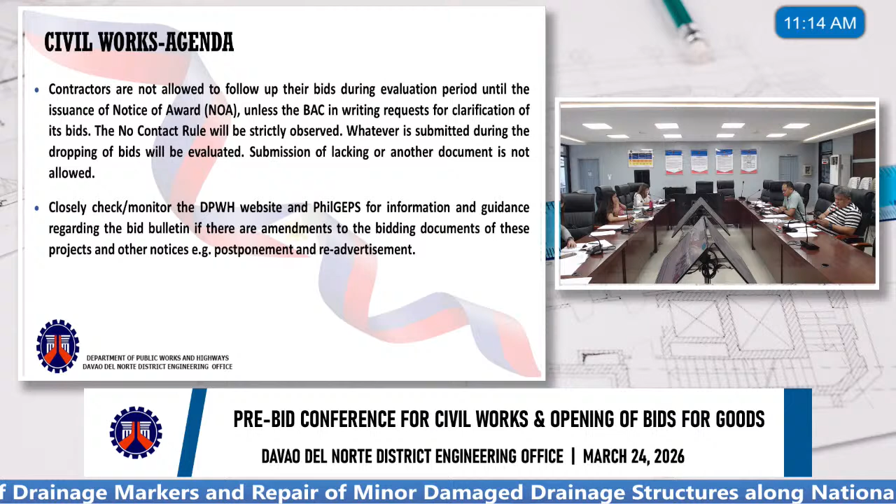If there are any changes in the basic contract data of these projects, kindly closely monitor the DPWH and PhilGEPS websites for information and guidance regarding bid bulletins, amendments to the bidding documents, and all other notices such as postponement or re-advertisement. The opening of bids will be on April 7, 2026 at 10 a.m. That's all, Mr. Chair.

Thank you. And last, for the summary of the proceedings: in summary, there are no changes in the basic contract data of the projects presented.

Okay. Timelines, none? Okay then. That's all for the pre-bid conference for the 5 civil works projects.

May we ask from our chairman if I will still be the presider for the opening of bids for goods. Okay, thank you, sir. So we are still in quorum, so let's continue on the opening of bids for goods. We have 5 RFQs.

RFQ number 1 is RFQ number 2025-12-0077, category 12 (41X), purchase and delivery of materials for the fabrication of signages during bridge closures within the first legislative district of Davao del Norte. Number 2 is RFQ number 2025-12-0078, category 1871X,

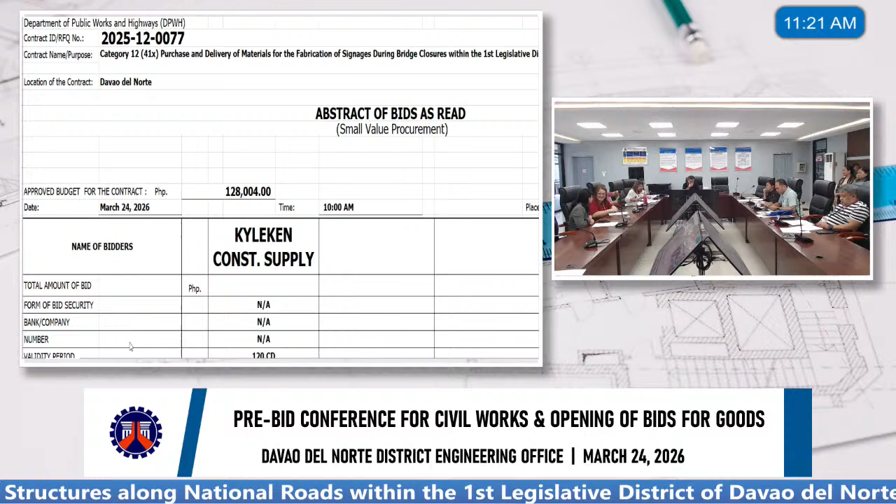We proceed. For Kyleken Construction and Supply, for the technical documents: PhilGEPS Platinum membership, present. Omnibus sworn statement in the form prescribed, 11 items, present. For the legal documents: DTI business name registration or SEC registration certificate or CDA for cooperatives, present. Valid and current mayor's permit or municipal license, present. Tax clearance per Executive Order Number 398 Series of 2005 as finally reviewed and approved by the BIR, present.

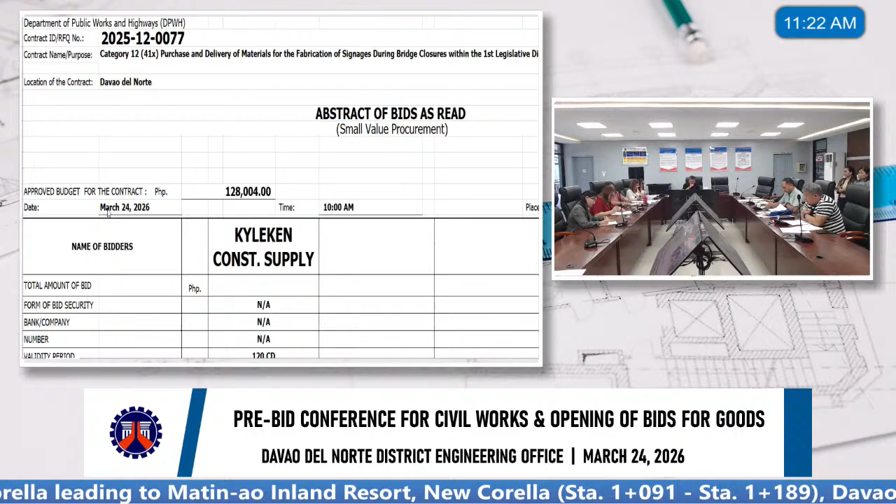Thank you, sir. Mr. Chair, Kyleken Construction and Supply submitted their eligibility and technical components for RFQ number 2025-12-0077. The preliminary evaluation of the eligibility and technical proposal of Kyleken Construction Supply is rated pass. Please proceed with the reading of its offered bid price.

For Kyleken Construction Supply, the offered bid price in words is 127,038 pesos and 45 centavos. Again, 127,038 pesos and 45 centavos. And it's below the ABC.

Okay, for 2025-12-0077, lone bidder Kyleken Construction Supply offered a bid amount of 127,038 pesos and 45 centavos. It is below ABC.

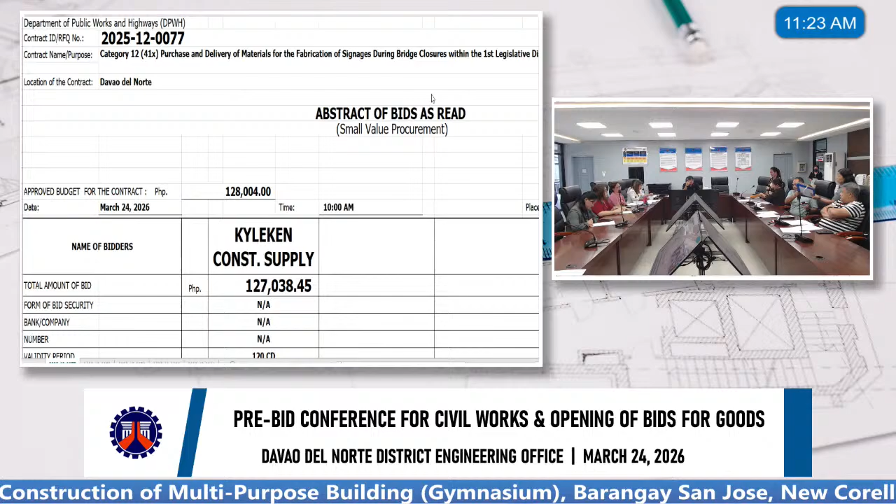So next RFQ, please. RFQ number 2025-12-0078. We have a lone bidder, FZI Construction Parts and Supply.

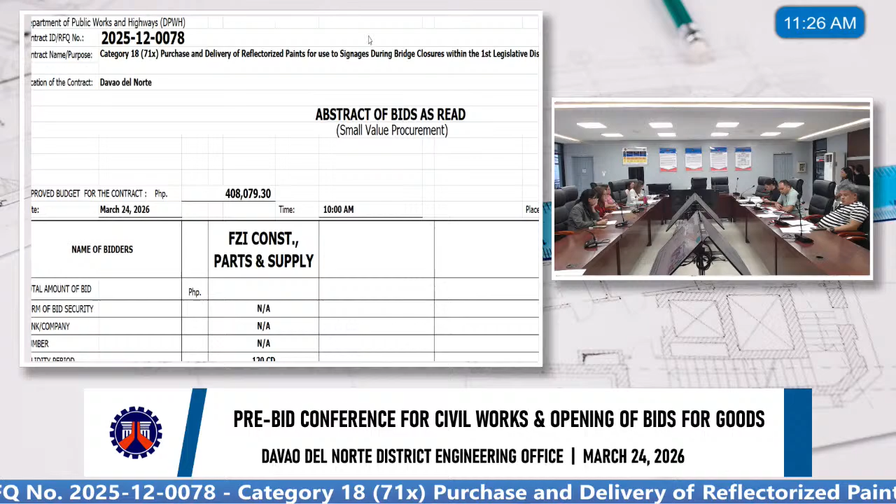For the technical documents: PhilGEPS Platinum Membership, present. Omnibus sworn statement in the form prescribed by GPPB, 11 items, present. DTI business name registration, SEC registration certificate, or CDA for cooperatives, present. Valid and current mayor's permit or municipal license, present. Tax clearance per Executive Order Number 398 Series of 2005 as finally reviewed and approved by the BIR, present. Thank you, ma'am.

Mr. Chair, FZI Construction Parts and Supply submitted their eligibility and technical components for the RFQ number 2025-12-0078. The preliminary evaluation of the technical components of FZI Construction Parts and Supply rated pass.

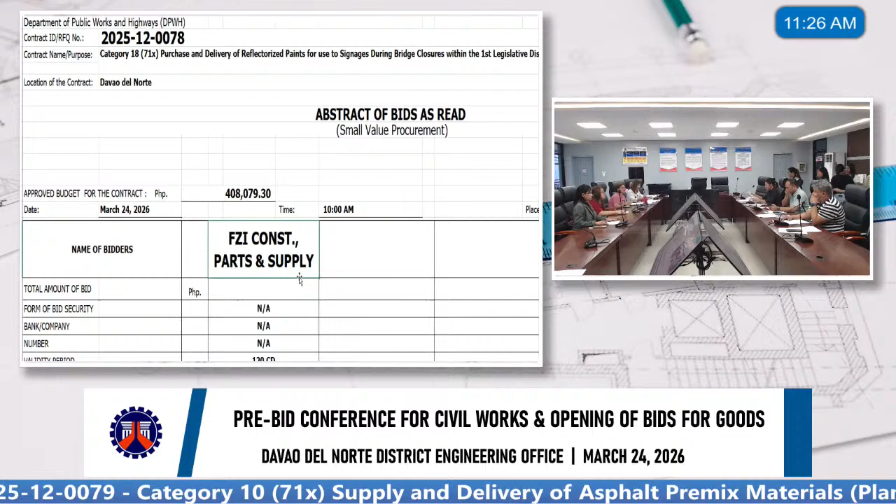Please proceed with the reading of its offered bid price. Yes, Mr. Chair. For RFQ number 2025-12-0078, the offered bid amount in words is 407,527 pesos and 50 cents only. In figures, 407,527.50. That is below the ABC amount, Mr. Chair. Okay, for 2025-12-0078, FZI Construction Parts and Supply offered a bid amount of 407,527 pesos and 50 centavos. It is below ABC. Okay, next RFQ please.

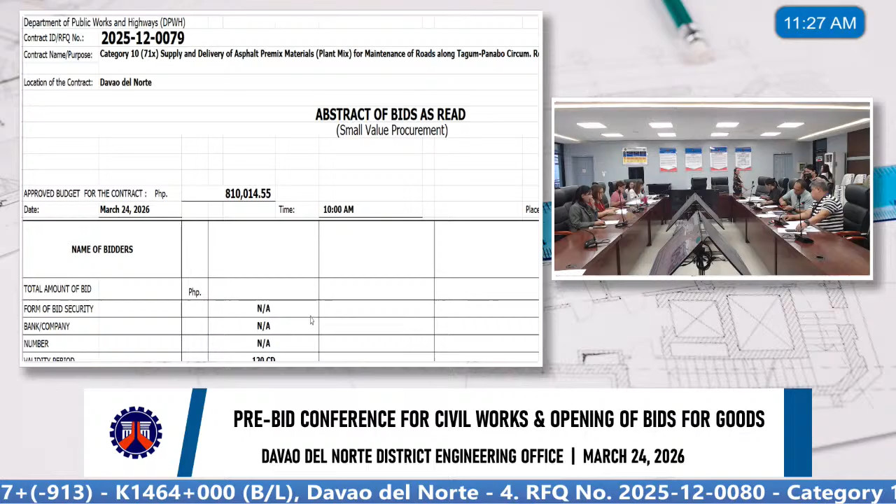RFQ number 2025-12-0079. We have a lone bidder, Constela Construction Supply.

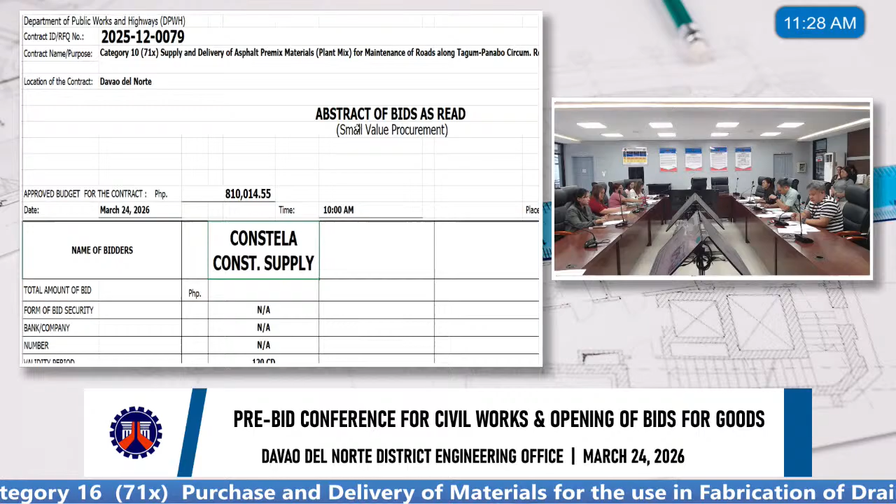Okay, proceed. Let's now check the eligibility and technical documents for Constela Construction Supply. PhilGEPS Platinum Membership, present. Omnibus sworn statement in the form prescribed by GPPB, 11 items, present. DTI business name registration, or SEC registration certificate, or CDA for cooperatives, present. Valid and current mayor's permit or municipal license, present. Tax clearance per Executive Order Number 398 Series of 2005 as finally reviewed and approved by the BIR, present. Thank you, sir.

Mr. Chair, Constela Construction Supply submitted the eligibility and technical components for the RFQ number 2025-12-0079. Okay, the preliminary evaluation of the eligibility and technical proposal of Constela Construction Supply rated pass. Please proceed with the reading of its offered bid price.

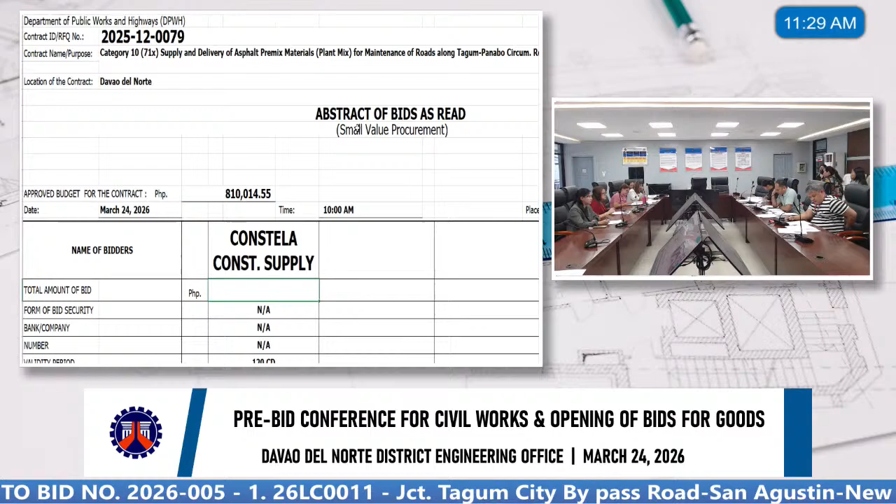Okay, Constela Construction Supply with RFQ number 2025-12-0079. The offered bid price in words, 809,508 pesos only. Again, 809,508 pesos. And it's below the ABC, Mr. Chair. Okay, thank you. For 2025-12-0079, lone bidder Constela Construction Supply offered a bid amount of 809,508 pesos only. Again, 809,508 pesos only. It is below ABC.

Okay, next RFQ please. RFQ number 2025-12-0080. We have a lone bidder, M&B Ceniza Gasoline Station.

Please proceed. Let's now check M&B Ceniza Gasoline Station for the eligibility and technical documents. For the technical documents: PhilGEPS Platinum Membership, present. Omnibus sworn statement in the form prescribed by GPPB, 11 items, present. For the legal documents: DTI business name registration, SEC registration certificate, or CDA for cooperatives, present. Valid and current mayor's permit or municipal license, present. Tax clearance per Executive Order Number 398 Series of 2005 as finally reviewed and approved by the BIR, present. Thank you, ma'am.

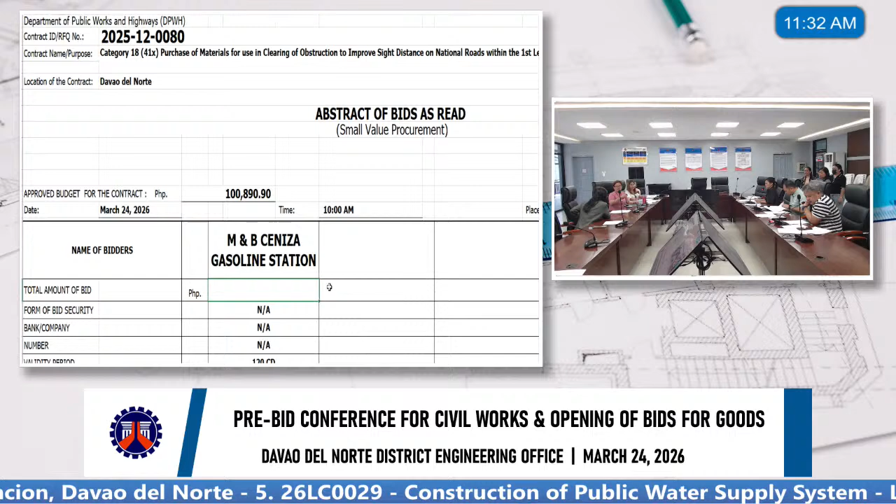Mr. Chair, M&B Ceniza Gasoline Station submitted their eligibility and technical components for the RFQ number 2025-12-0080. Okay, the preliminary evaluation of the eligibility and technical proposal of M&B Ceniza Gasoline Station rated pass. Please proceed with the reading of its offered bid price.

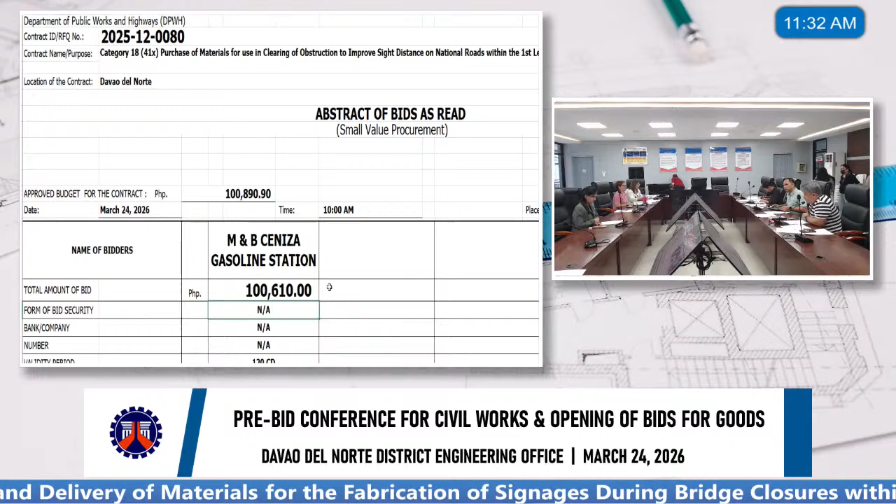Yes, Mr. Chair. For RFQ number 2025-12-0080, the total bid amount in words is 100,610 pesos only. In figures, that's 100,610.00, below the ABC amount, Mr. Chair. Okay, thank you. For 2025-12-0080, lone bidder M&B Ceniza Gasoline Station offered a bid amount of 100,610 pesos. Again, 100,610 pesos. And it is below ABC. Okay, for the last, okay, proceed to the next RFQ.

Last number, RFQ number 2025-12-0081. We have a lone bidder, Andrich Construction.

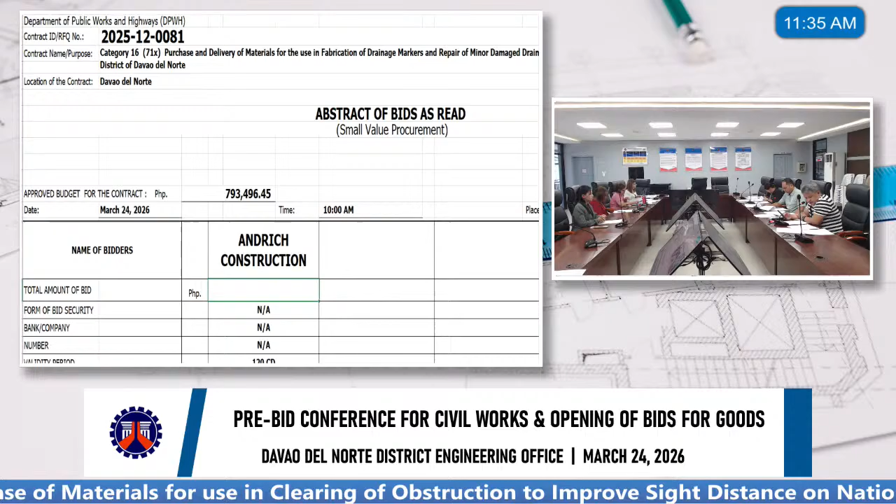Mr. Chair, Andrich Construction submitted the eligibility and technical components for the RFQ number 2025-12-0081. Okay, the preliminary evaluation of the eligibility and technical proposal of Andrich Construction rated pass. Please proceed with the reading of its offered bid price.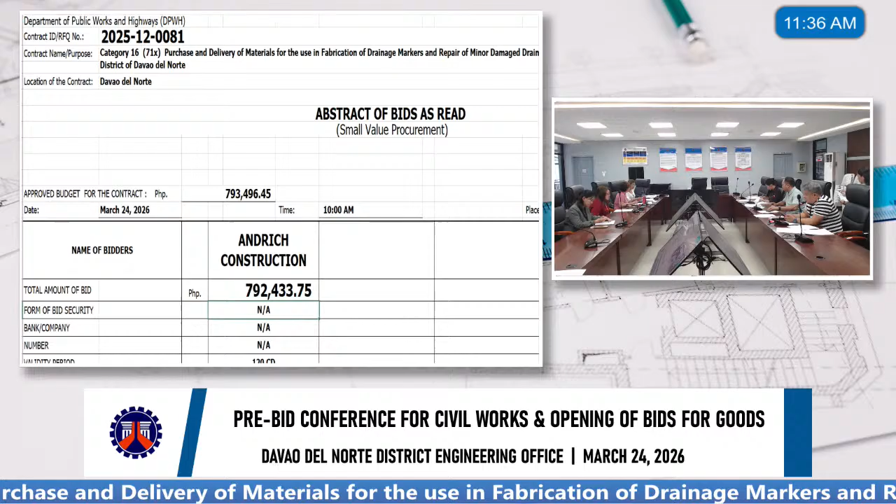Yes, Mr. Chair. For lone bidder Andrich Construction, the offered bid price in words, 792,433 pesos and 75 centavos only. Again, 792,433 pesos and 75 centavos. And it's below the ABC. Okay, thank you. For 2025-12-0081, Andrich Construction offered a bid amount of 792,433 pesos and 75 centavos. Again, 792,433 pesos and 75 centavos. It is below ABC.

So that's all for the 5 RFQs scheduled for opening today. BAC Sec, any timelines or information regarding this procurement activity? For the timelines, Mr. Chair, the bid evaluation will be on March 24 and post-qualification will be on March 25. That's all, Mr. Chair.